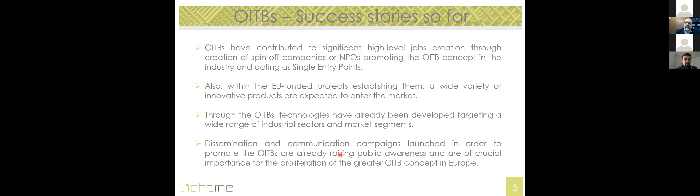I just want to go to the last point. An important aspect of the ecosystem is to favor the dissemination and communication of the technology, of all the actions taken by the partners and by the single entry point, and so by the ecosystem, and to cooperate with other testbed ecosystems. This is also the reason for today's open call, because within the project we have the possibility, at least in the first part of the ecosystem, to select some projects—this will be clarified later—and to sustain, promote, and demonstrate the usefulness and advantages coming from the ecosystem, approaching these selected test cases.

Specifically about the LightMe project, it consists of 25 partners. We are basically at the end of the second year. It will last for 48 months. 15 countries are involved. The budget allocated is important, and you see here the participants, the partners of the project, and the Politecnico, in this case Politecnico di Milano, is the coordinator.

As I said, the LightMe project is specifically dedicated to lightweight metal alloys, so we talk about aluminum alloys, magnesium alloys, and titanium alloys. Not only this, but another important part of the project is the implementation of some existing pilot lines at the European level to a higher TRL, in order to be able to produce not only traditional alloys, but the same alloys with composite characteristics—so the possibility to produce nanocomposites. To be more clear, the possibility to have a dispersion into all these alloys of nanoparticles of different nature, specifically tailored for the application in that specific alloy, with the scope of generating lightweight materials, lightweight components with improved properties.

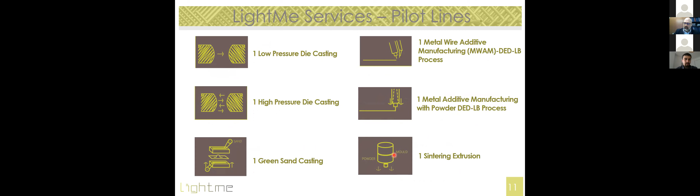Very last slide, I don't want to take too much time. Just a picture of the pilot lines: we have 6 pilot lines - low pressure die casting, high pressure die casting, green sand casting, and then 2 additive manufacturing lines, one with metal wire and one with the powder process, plus the sintering extrusion one. You will have details later in the following presentations.

LightMe project is an important ecosystem, and wants to be an important example of an ecosystem dedicated to lightweight materials, especially composite lightweight materials. You will see the following presentations for more details regarding the services we can offer.

We are at the setting up of the single entry point. Today the event is dedicated to the Open Call, the possibility we want to offer to European companies to be in contact with the ecosystem, to propose their project, with the possibility to see this project realized within the ecosystem.

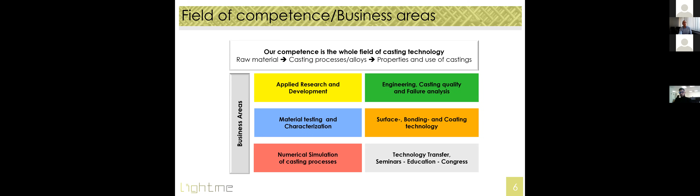So what's our field of competence? Our field areas are applied research and development, engineering, casting quality, failure analysis, material testing, surface bonding and coating technology, numerical simulation, and technology transfer. All a bit of what we do also in the other pilot lines of expertise. In the other ones we have supporting know-how, which we bring into our pilot lines.

So really everything you need to deal with customers that are coming from the foundry industry, but mainly these services are only applied individually for individual customers, so they don't come and do everything at once, although we could do it, but usually customers pick and mix their own, according to their own requirements.

So now we come to our equipment, which was used in the pilot line. We have two units there. One is the low pressure die casting machine in red, the LPDC pilot line, and then we have a sand casting facility, which is for green sand castings in blue, the GSC pilot line.

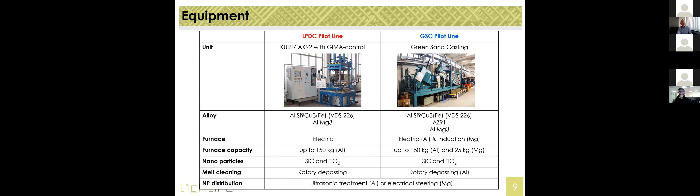So here you see the molding shop for the sand casting. We have different types of molds available. You can basically, we all know you can build sand castles at the beach, and this is a bit of a similar task we have to do here, just we don't use just water.

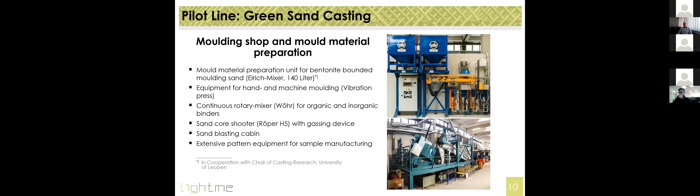We use either water and bentonite, which is the dark method below, and we use bonded sand, polymer bonded sand, which you see in the pictures above. We mix these sands as a granular material together and then form it on our mold, similar to how you do a sand mold with your children on the beach, if you make it very, very simplified, but that's basically how we do it.

Of course, we don't use little star shapes and cake shapes, but we have industrial technological shapes. You see here a green model and a step plate of aluminium, and each step gives us a different cooling rate later on to assess the effect of cooling rate on our material properties, together with the nanoparticles we want to introduce into our material.

You have this green mold, and in this green mold you press your sand mold around it and put a frame on top. You fill it with sand and press the sand against the green mold, then withdraw the mold and you have the cavity. Into that cavity you feed your specially treated melt with nanoparticles.

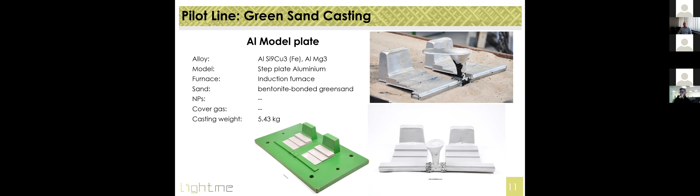Here you see some samples we tested first with normal alloys without nanoparticles, but we also did the same with nanoparticles. We're capable of producing samples at real sample size scale, not coffee cup scale. The next challenge, since we have the technology to upscale it, is to go to the 100 kilogram class, close to industrial series production—so a pilot line, in other words.

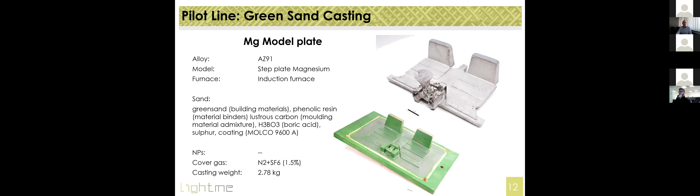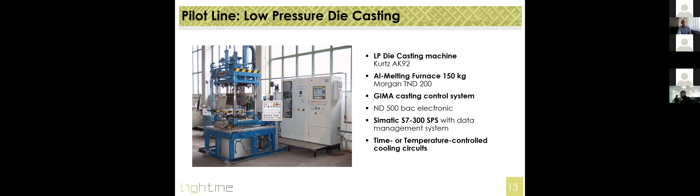This is the low pressure die casting machine here. You can see this is the furnace which you can put under pressure, and in the middle you have a little tube. If you apply pressure onto the melt inside the furnace, the melt will rise into the tube, into the mold. You can control the pressure very accurately, because the flow of the melt depends on the pressure applied. This gives this GIMA machine very nice control over the pressure and flow rates inside the melt, so we don't produce any defects in the casting.

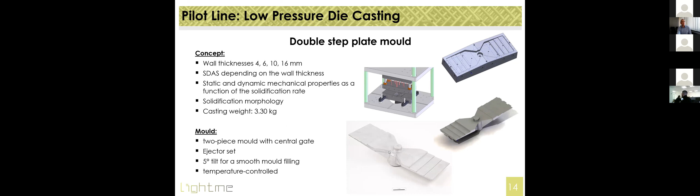That concludes my overview of the pilot scale for the low pressure die casting and the sand casting facilities. Thank you for your attention.

Let's see if we have any questions. Thank you for your presentation, Peter. I think we don't have any questions.

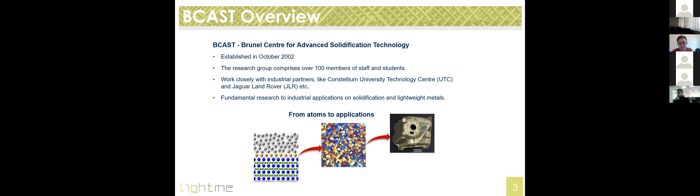So in terms of the high-pressure die-cast pipeline and workflows, we can see basically the whole workflow: we start from ingots and melt, and afterwards we degas the melts and follow by introducing nanoparticles into the melt. After that, we cast it into the high pressure die caster, and afterwards we check the microstructure and mechanical properties of the castings.

During the whole process, we have some facilities available. For example, for the composition test, we've got a foundry master. For hydrogen content, we can use the RPT test. We use the degas mixing unit to introduce the nanoparticles into the melt.

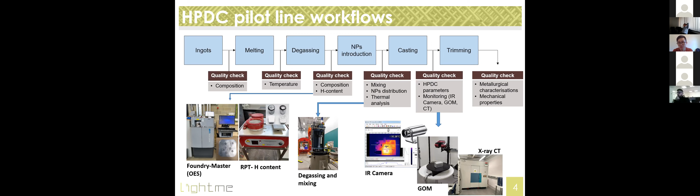We also use different types of monitoring instruments, like IR cameras to check the die or melt temperatures and do thermal analysis. We have GOM facilities to check the geometry and do other measurements of the castings. And we also have CT and other instruments to check the defects or agglomerations in the castings.

On top of that, we also have a wide range of other research facilities available which could contribute to the high pressure die-cast lines. We have different types of casting lines, and we can also do mechanical testing.

Now we can do different types of characterization - X-ray diffraction, CT scanning. We have different types of SEM and TEM facilities for checking the microstructure of the component or castings. We also have hardness indenters, tensile machines, fatigue machines, etc. And the high pressure die cast machine is mainly the facility we're going to use in the high pressure die cast pipelines.

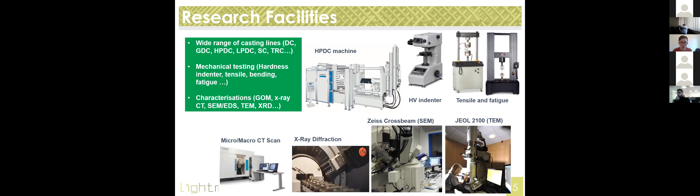Specifically in terms of the two high pressure die cast pipelines, we have two machines available. One of them is the FRECH DAK 450, which is the smaller one. It can deal with a volume of aluminum casting from 1.5 to 5 kilograms, and for magnesium it can produce 1 to 3 kg in terms of volume.

The machine is equipped with two 40 kg furnaces, and the melt is transferred to the shot sleeve manually. The cycle time is about 120 seconds, and the vacuum system here ranges from 50 to 70 mbar.

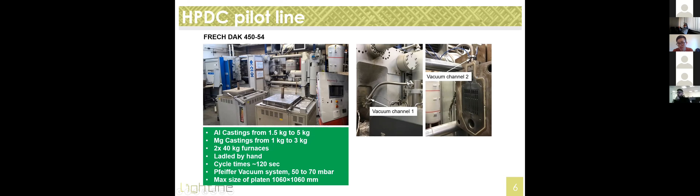The maximum size of the platen for this small machine is about 1060 by 1060 millimeters. On the right hand side, you can see we've got different vacuum channels - one is connected to the shot sleeve, another is connected to the vacuum connected to the die cavity.

Another larger high pressure die caster here gives some information in detail. First, the volume for aluminium is from 8 to 32 kg, and it has a 600 kg dosing furnace. The machine is supported by an ABB robotic system, and the typical cycle time is about 60 to 120 seconds as well.

The machine is also vacuum assisted, and the vacuum can reach as low as 20 to 30 mbar. The maximum size of the platen here is about 2 meters by 2 meters.

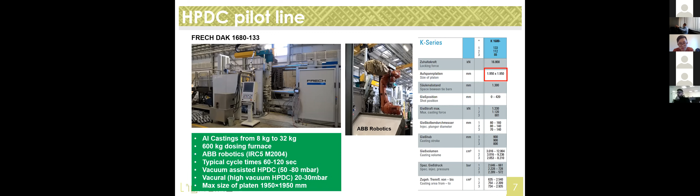So this is basically the two pipelines, especially for the caster. In relation to these two specific pipelines, we are working closely with other partners. As the previous presenters mentioned, different sections like monitoring, testing, or modeling can be inserted into our pipeline to give us support for the LightMe project as a whole.

So yeah, that's basically everything - a brief introduction of the two high-pressure die-cast lines on our side. If you have any questions, thank you very much.

Thank you, Wang. Let's see if you have any questions regarding your pilot line. Probably not. Yeah, I'm going to stop the sharing. If not, we can move it to you. Yeah, we can move to the next pilot line.

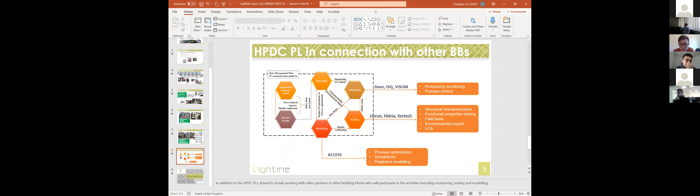I think Pilar is here. Yes, hello. Hi, Pedro. Hi, all. Hello. So I'm going to share my screen. Okay. Here he is. Okay. Okay. So it's full screen, hopefully you can see well. Yes.

So hello everyone, thank you for attending this webinar. I'm going to present the metal wire additive manufacturing pilot line - a technology based on directed energy deposition using a laser as a focused beam and wire.

This pilot line is in charge of AIMEN. Very briefly, AIMEN was established in 1967, with many years promoting R&D projects and technology services to industry in these fields. We are more or less 250 people, and we work on more than 50 R&D projects per year.

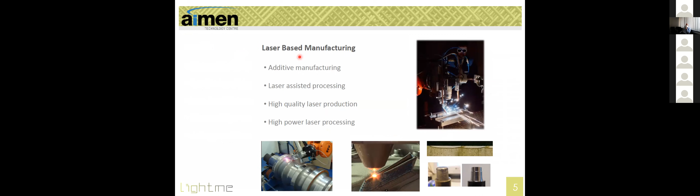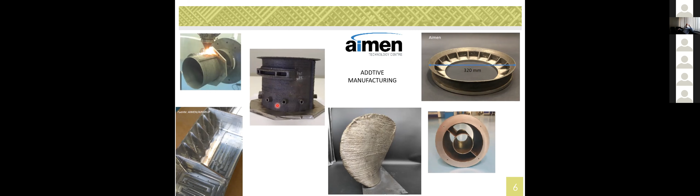This pilot line is in charge of the advanced manufacturing department that is very focused on laser manufacturing. One of the most active fields of research nowadays is additive manufacturing. Here you can see some components that have been manufactured in different projects and different materials using always the laser process, but using powder or wire, because we have both capabilities in our facilities.

So let's move specifically to our role in LightMe. In LightMe, we are in charge of this pilot line. There are two additive manufacturing pilot lines; ours is focusing on laser and wire. We also participate in other building blocks of the ecosystem, such as testing or monitoring.

Our upgrades in LightMe - because we have several cells working with this type of process - the interest of LightMe was the inclusion of a new coaxial wire head, a build plate with controlled temperature, and a system to work under inert gas atmosphere, above all because LightMe is very focused on lightweight alloys that are very reactive under air. So it's very important to protect these alloys in order to achieve better properties.

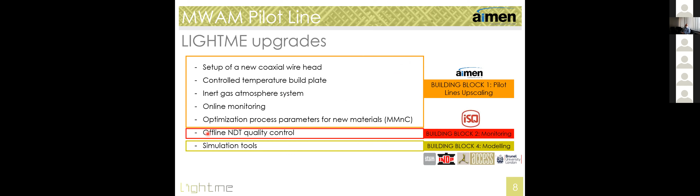We also have capabilities for online monitoring, for example of the melt pool. We work on optimizing the process parameters when we deal with new materials, above all in the case of metal matrix composites. We also collaborate with other building blocks in terms of, for example, offline inspection of the quality of our parts and simulation tools.

Three main elements have been included in our new pilot line. One is this head that works with a coaxial wire. The other is a table that allows us to work in two axes, summing up to the axis in which a robot can work. And putting it all together, we need to protect this working place with an inert chamber in order to remove all the oxygen to work properly.

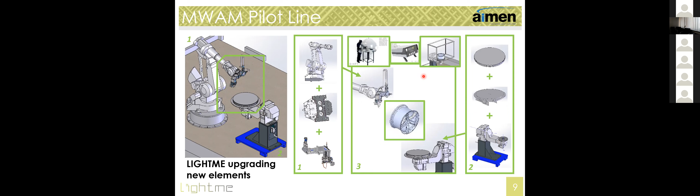The advantage of these upgrades can be summarized here: in the case of working with a laser coaxial head instead of feeding the wire laterally, the melt pool is independent of the welding direction. So we can achieve better properties because we are not dependent on the direction or gravity. Also the thermal impact and dilution is lower, so the distortion becomes lower too, meaning better quality and repeatability.

In order to avoid problems or defects in additive manufacturing, such as crack susceptibility, we can reduce the residual stresses that can develop these cracks by preheating the table or base plate, minimizing this problem that is very typical in additive manufacturing because of the fast cooling of the process. This table has been designed to allow all the movements inside the working zone.

Together with this, we implement a new inert chamber that allows us to work under 50 ppm of oxygen, suitable for working with very reactive metals such as titanium, magnesium, and aluminum.

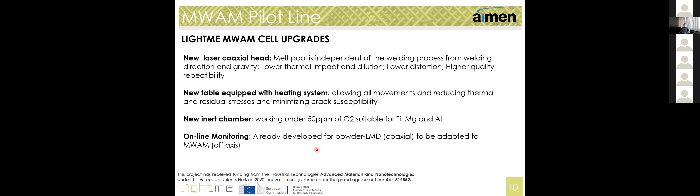We are also adapting a system we already developed for powder LMD, that is coaxial - a thermal infrared camera that will be placed at the tip of the axis in order to monitor the melt pool. This allows us, for example, to reconstruct the thermal history of a component in a 3D way.

So this is our cell with the robot and the rotating table, with the laser coaxial head placed inside this - it's like a glove box. We have gloves here to manipulate the working space. We have to open this bag, but in any case we have included some zippers in order to manipulate the head or this thumb, trying to minimize the loss of the inert atmosphere.

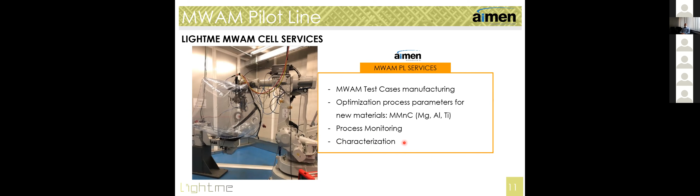Our services include parametrization when we deal with these new materials, but also the manufacturing of test cases. Our performance in terms of wires is more or less 2 kilos per hour, which is quite high for additive manufacturing, allowing us to manufacture, in that case, a 0.5 meter component. This could be adapted to bigger components, and is designed for the test cases we will deal with inside the LightMe project with current partners. It also serves as process monitoring and characterization of materials developed in terms of quality, optimization of the process, and final properties.

Bear in mind that in welding, this color could be acceptable because at the end you can remove it, but not in additive manufacturing, where all components are manufactured layer by layer. If you allow this minimum oxidation and put another layer on top of the previous one, you're going to have a lot of layers with a very fine layer of oxides in the middle, which will have a strong impact on the mechanical properties of your coupons. So it's very important to have a high protection of our working place, like here.

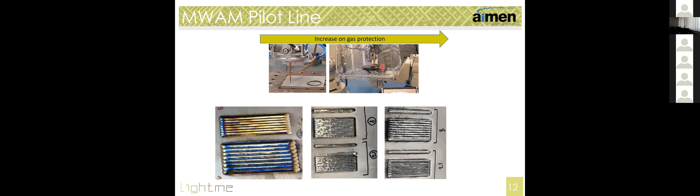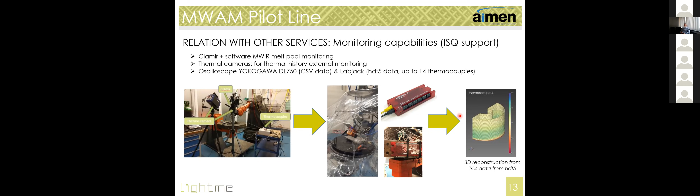We can also use thermocameras to have a look at the process for the heating and cooling of the component, and we have infrared cameras that can be used to monitor the melt pool. Together with the thermocameras and thermocouples, using this kind of data file called HDF5, we can reconstruct a component in terms of the thermal history, and check what happened with this part during manufacturing. This information can be related to the simulation and also to the properties or defects that you can have in your test case.

It's also very important to test the material, the coupons, the components. In AIMEN, we have some testing capabilities and also some partners that can support us with other techniques or analysis. We can make quality control, inspection, and characterization applied to feedstock analysis, because it's very important to check the quality of, for example, the powder. In our case, we use wire, but it's very important to have a look at how this feedstock is.

Once we have the deposits, we can carry out some microstructural analysis in order to see the height or width of our melt pool, once it's cooled. Also, when we apply different layers, we can check the quality of the microstructure.

In terms of testing, we can do some mechanical tests such as tensile, and with the support of ISQ, we can use miniaturized specimens to screen different parts of a coupon that can have different properties due to different temperatures or residual stresses, because the additive manufacturing process is very anisotropic, and it's important to check the properties in different directions of our manufactured part. We can carry out destructive testing, but also apply non-destructive testing and inspection, to check if the coupon has pores, cracking, or other types of defects that can impact our properties.

Okay, I'm Gianluigi from Iris SRL. Sorry, Gianluigi, just a comment: can you switch the presentation, because we are seeing the presenter mode, so we are seeing the screen from the presenter and not the full screen. I'm waiting, see if you can change it. If not, we can see, but...

Is it better now? It's the same, but I think you can go ahead. Can you see the screen with the presentation mode now? We are seeing the presenter mode, but you can present. We can see the slides. Okay.

As I told you before, I'm Gianluigi De Simone from IRIS. We are the owner of the Borealis pilot line. Now I'll give you a few words about who we are. We are a small enterprise specialized in developing applications of laser and plasma technologies, and we are located in Turin, in the north of Italy.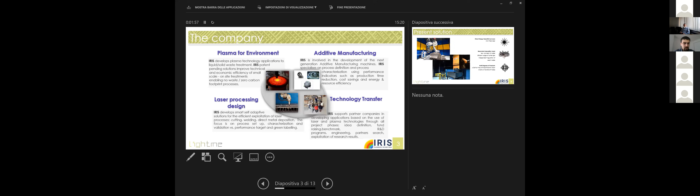So we are involved of course in this project, but also in several projects about additive manufacturing of metal. We also work with laser processing design, so we are able to develop smart technologies or smart self-adaptive solutions for cutting and welding processes. And we are able to do a sort of know-how transfer, because we can engineer a process and sell the process to the customer.

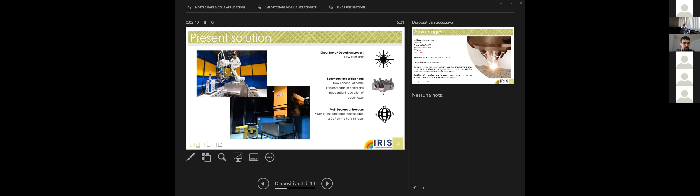The Borealis pilot line is composed of 2 machines. The first one on the left is an anthropomorphic robot. The second one on the right has Cartesian movement. They are equipped with a 3 kilowatt fiber laser, and we have a redundant deposition head, which I will explain in the next slides. Both have 6 degrees of freedom plus 2 more degrees of freedom on the rotative table.

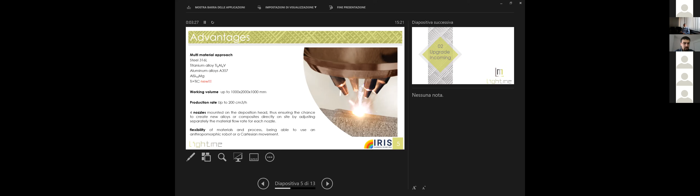The Borealis pilot line can work with different materials such as steel, titanium alloy or aluminum alloy, and in the project also with titanium carbide. We have a very huge volume, so it's possible to manufacture larger components or many small components. The flexibility of the process is, of course, for the dimension and shape of the final component, but also for the flexibility in the material approach.

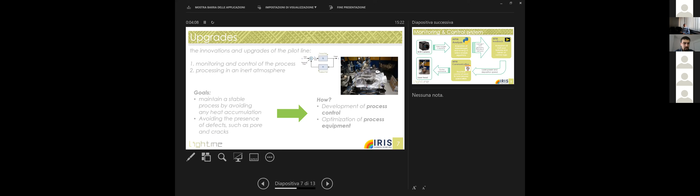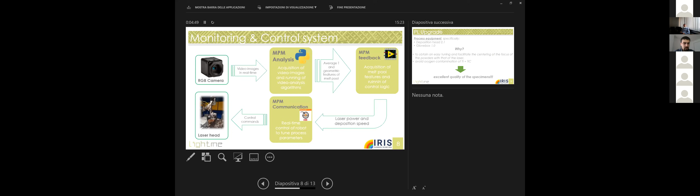Just a few words about the monitoring and control system. It takes place through the acquisition of the melt pool image. So the geometry, or better, the dimension and the temperature of the melt pool are compared with the expected values from the mathematical model. And if there are significant deviations, feedback is given to the robot, which corrects the process parameters and reestablishes the optimal working condition.

The second activity of upgrade is, of course, about the process equipment. We are going to perform this task because we want to obtain some specimens and, of course, some final components with excellent quality.

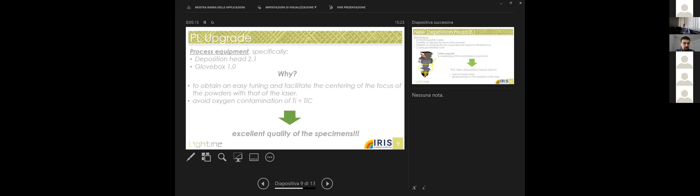The deposition head used in the Borealis pilot line is made of 4 interchangeable nozzles, with the possibility of tuning the focus of the powder with the focus of the laser. We are able to make a different alloy in the melted pool, because through each nozzle we can feed different material, different metal.

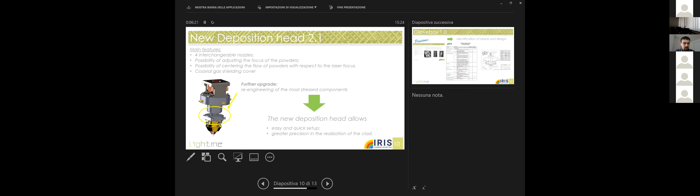In the first stage, we used a coaxial gas shielding cover, but we discovered that it was not enough, and we are going to re-engineer the most stressed components of the deposition head, because we of course need an easy and quick setup.

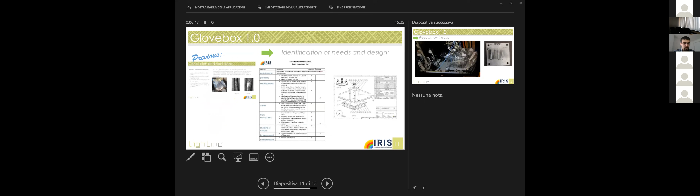As I told you before, we discovered that shielding gas was not enough for avoiding the oxidation of titanium carbide. So we designed and built our own inert gas chamber. Here I want to show how it works after the first improvement of the pilot line.

On the right side of the slide, there are some tests we performed, and there are few pores, no cracks, and no oxidation.

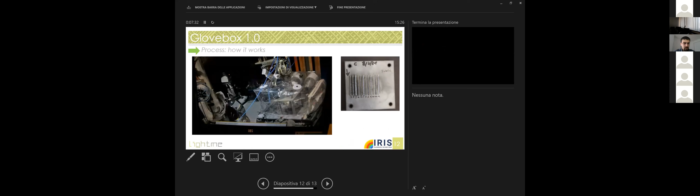Okay, thanks for your attention, and I hope I was clear. If you have some questions, please ask me.

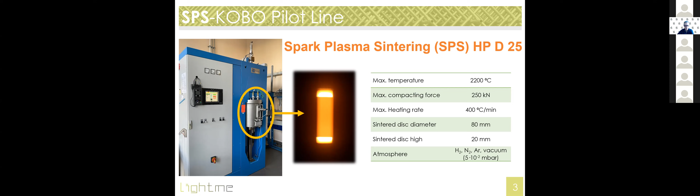And the materials are obtained using the SPS HPD25 device manufactured by FCT System from Germany, which is the main module of our pilot line. In general, in the world, all researchers use tools for the SPS technology made from graphite.

In our case, in the LightMe project, we optimized this technology for using tools from W360 hot-working steel, which allows us to obtain better accuracy of dimensions at temperatures up to 600 degrees. This means it is for aluminum-based composites.

And for higher temperatures, it is possible to use one of the more advanced grades of graphite, high strength 2334 from Mersen. Also, in the LightMe project, we designed and manufactured an assembly module to assemble these tools in a semi-automatic process.

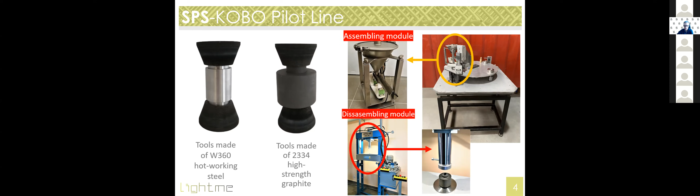And also available in our lab is a disassembly module for disassembling this set of tools after the sintering process, obtaining the sintered compacts in a very fast track.

In the LightMe project, we are responsible for sintering aluminum 7075 alloy reinforced by nano silicon carbide in a very fast track. It is more or less 20 minutes from the powder material to a full dense sintered body. And this sintered body is extruded in two types of presses.

The first one, smaller, is available at the Poznań facility, and the bigger one is available at the Gliwice facility in our research network. A specific feature here is cold extrusion of the sintered sample with high oscillation angle and some oscillation frequency.

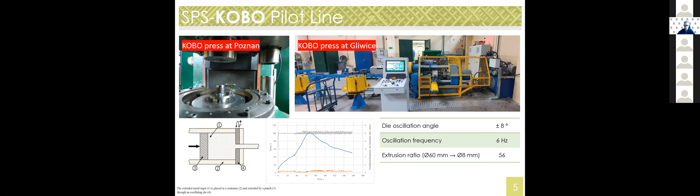What's related to this is that during the extrusion from the sintered disc to the extruded rod, we have a significant decrease of grain size, which is correlated, of course, with an increase of mechanical properties of the obtained profiles.

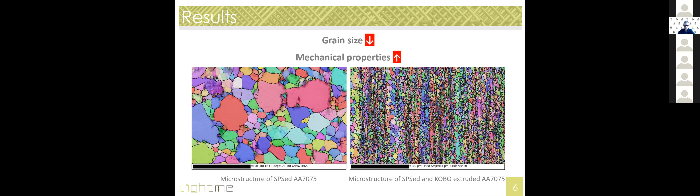In these EBSD maps, you can see a significant decrease of grain size. What we can offer in LightMe for JVST partners and others interested in this technology is the association of two advanced sintering techniques: SPS and KOBO extrusion.

But in this case, for manufacturing fasteners, forging is needed to make a head, for example, and additional heat treatment to increase the strength and decrease the ductility after processing the rod. And of course, at the end, we offer characterization from microstructure observations to mechanical properties testing.

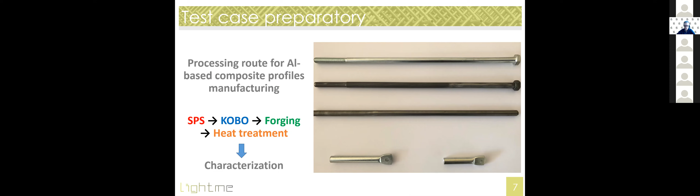So that's all from my side. Thank you for your attention, and if you have questions, please ask me.

This was the last presentation from the pilot lines. I don't know if there is any question regarding any presentation that we had now. If not, we can go to the next topic, that is about the LightMe services.

I will be presenting the technical services of the ecosystem. Good evening from my side, I'm Xavier Costula and I'm working at Politecnico di Milano. I will present the technical services that go beyond the pilot lines we have already seen. These are services included in the monitoring, modeling, and testing building block.

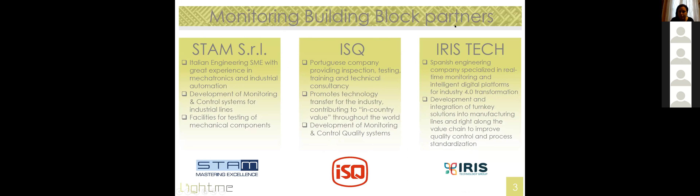A short presentation for the partners of the monitoring building block. We have STAM SRL, an Italian engineering SME with great experience in mechatronics and industrial automation. We have ISQ, a Portuguese company providing inspection, testing, training, and technical consultancy. And we have IRIS TECH, a Spanish engineering company specialized in real-time monitoring and intelligent digital platforms for industry.

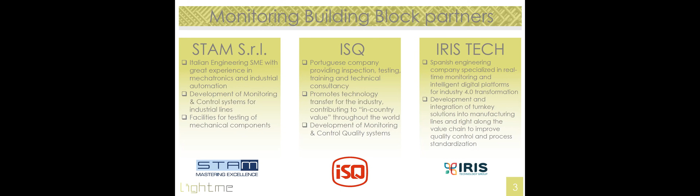The services that the monitoring building block is offering are monitoring and control systems, as well as quality control systems for additive manufacturing processes, a monitoring system with thermographic cameras for high pressure die casting and spark plasma sintering processes, a test bench for the assessment of small and medium-sized gearboxes equipped with dynamic torque meters and vibration sensors, and finally quality control and testing for metallic and composite components.

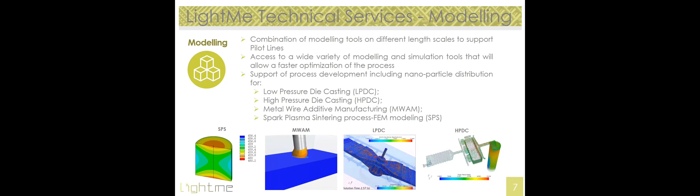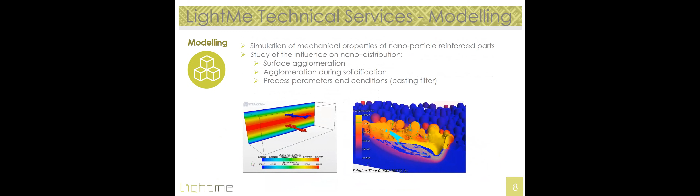The services offered by the modeling building block are a combination of modeling tools on different length scales to support pilot lines. They provide access to a wide variety of modeling and simulation tools that will allow faster optimization of the process, and they support process development including nanoparticle distribution for low and high pressure die casting, metal wire additive manufacturing, and spark plasma sintering process modeling. They also provide services on simulation of mechanical properties of nanoparticle reinforced parts, and studies of the influence of nanoparticle distribution, meaning surface agglomeration, agglomeration during solidification, and process parameters and conditions.

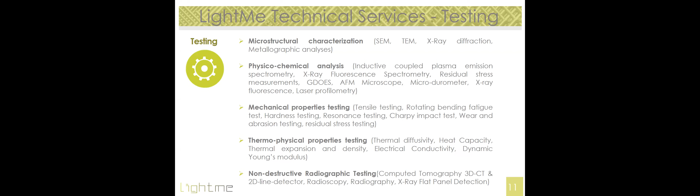Within this building block, the services offered go from microstructural characterization with SEM, TEM, X-ray diffraction to physicochemical analysis, mechanical properties testing such as tensile testing, wear and abrasion testing, thermophysical properties testing, and finally non-destructive radiographic testing. So that's it from my side briefly.

Okay, regarding the non-technical services, it will be Alex. Yes, just let me... Sorry, I don't see also questions, so... Okay, sorry, now. Sorry for this. No problem. You can see the presentation or the presentation mode? Yes, it is okay, Alex, you can go. Okay, perfect.

So, non-technical services: the target of the Open Innovation Testbed is to provide holistic solutions, or what we call one-stop shop solutions, to the SMEs or enterprises that will enter the ecosystem in order to receive the services. The ecosystem will provide a group of non-technical services that target the holistic characterization and provision of data necessary for bringing a new product or material to the market. So the groups are environmental assessment of environmental impact through LCA/LCC, health and safety, regulation, consultancy, innovation management, access to funding, and training.

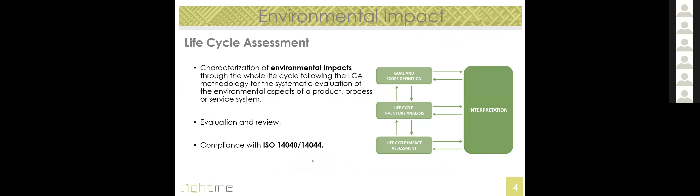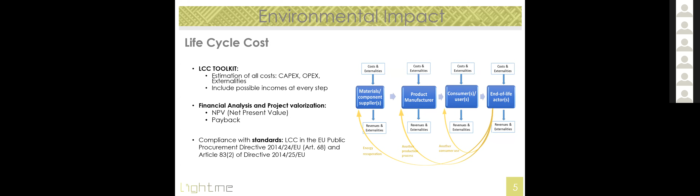I will go quickly because I see we only have 10 minutes. So we have environmental impact: what we can do is conduct life cycle assessment through specific use of software in compliance with the existing ISO for LCA, and also conduct LCC analysis, financial analysis, and project valorization to estimate costs like CapEx, OpEx, other costs, and also to include possible incomes at the various steps or phases of the value chain.

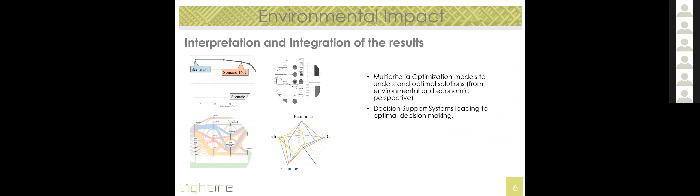Interpretation and integration of these results using multi-criteria optimization models to understand the optimum solutions and to apply decision support tools leading to optimal decision making regarding raw materials, functionalities, etc.

In health and safety, this part is led by ISQ. The previous part was led by University of Burgos. So in health and safety and nano safety we have the leader ISQ, and also Politecnico di Milano provides assistance together with University of Burgos, especially in the part of nano safety.

We have identification and compliance with the regulatory context related to issues about health, safety, and environment, with a focus on the pilot lines. So we are focusing a lot on occupational health, on possible application of this in production lines, and we perform nanoparticle monitoring activities in order to identify release of nanoparticles in the working environment, ranging between 10 and 420 nanometers.

These services will be provided through a two-stage approach. One is related to completion of a questionnaire provided by ISQ, and also in situ monitoring measurements, again by ISQ, in the production line of the partners.

Regulation and standardization is provided by EWF, the Belgium Association of Welding and Joining. We have consultancy on standardization and regulatory aspects that will be tailored to upscaling concepts related to lightweight metal matrix and nanocomposites, depending on the market the partner needs to address, either automotive, aerospace, or the other markets that the LightMe Open Innovation Testbed serves.